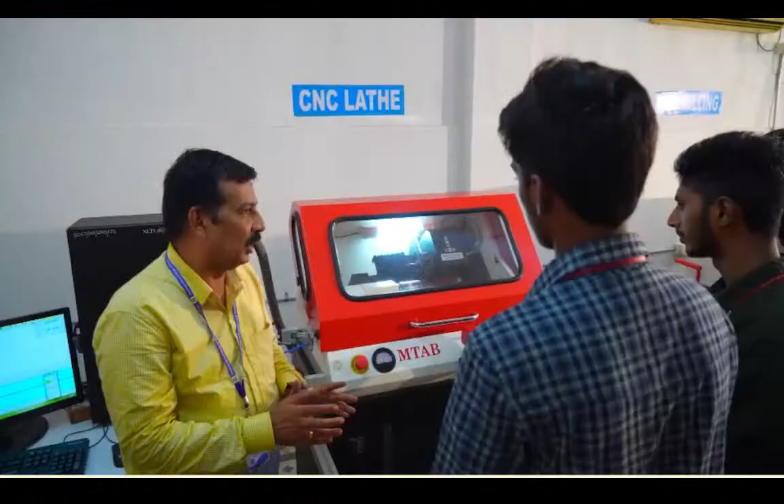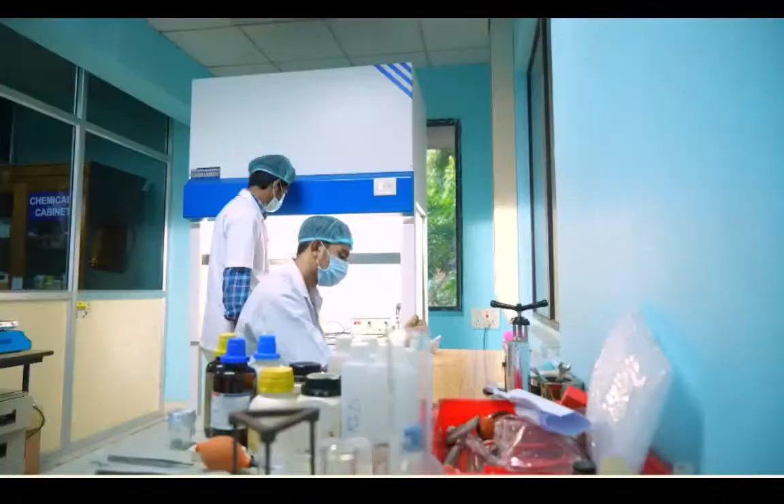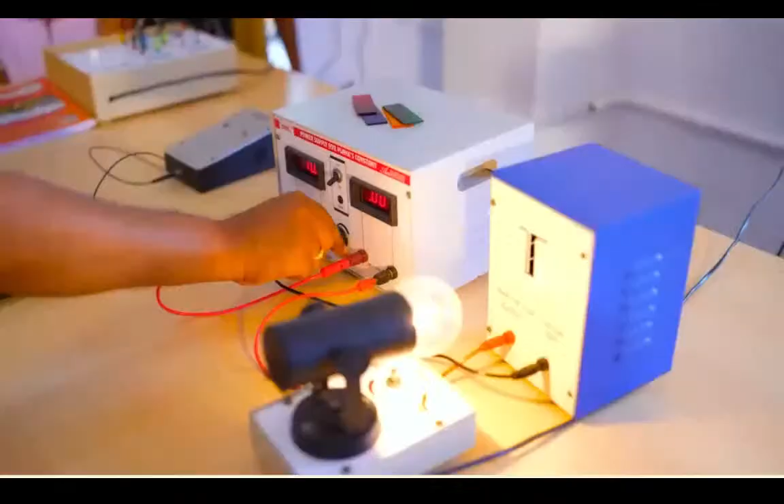Workshops of all branches, namely mechanical, electronics, computer science, robotics, artificial intelligence, nanotechnology, are equipped with the latest machinery and tools that help the students hone their practical skills.

Swarnandhra constantly motivates its students towards a fulfilling learning experience. There are 5 separate hostels available in the campus of Swarnandhra College of Engineering and Technology.

Hygienic mess and food courts. Round-the-clock security. CCTV surveillance in the campus. Departmental stores and ATM center serve the needs of students here.

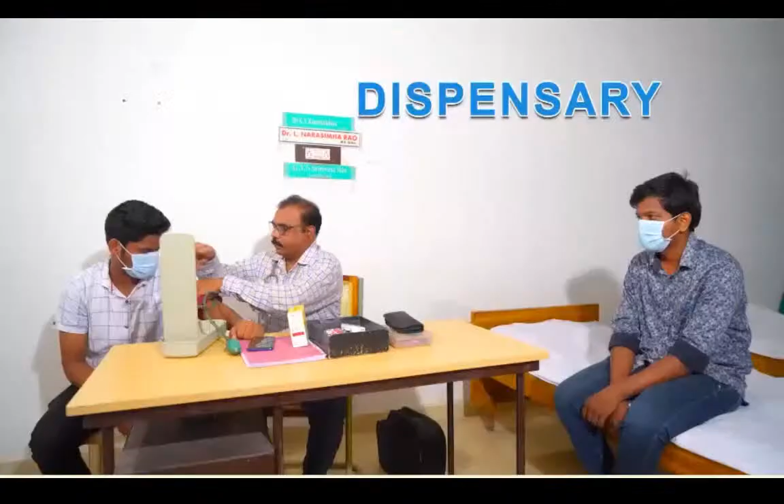We are adapting the latest technologies in the syllabus and curriculum periodically with the support of industry professionals. Your admission into Swarnandhra College of Engineering and Technology makes you transform your tomorrow with the skills you learn today, because stepping into their engineering program molds your creative absorption into technological passion.

The UG courses in BTech range from Civil, Mechanical, Electrical and Electronics and Communication, Computer Science, Information Technology, Artificial Intelligence and Machine Learning, CSE Data Science, CSE Cybersecurity, CSE and Business Systems, Artificial Intelligence and Data Science, Robotics. PG courses such as MBA, MCA, MTech, Structural Engineering, Power Electronics, CAD/CAM, VLSI Systems Design, Computer Science and Engineering, Thermal Engineering, Communication Systems. Diploma courses like Electrical and Electronics, Mechanical, Electronics and Communication, Computer Science and Engineering, Artificial Intelligence are all dealt with equal and efficient range of commitment and euphoria.

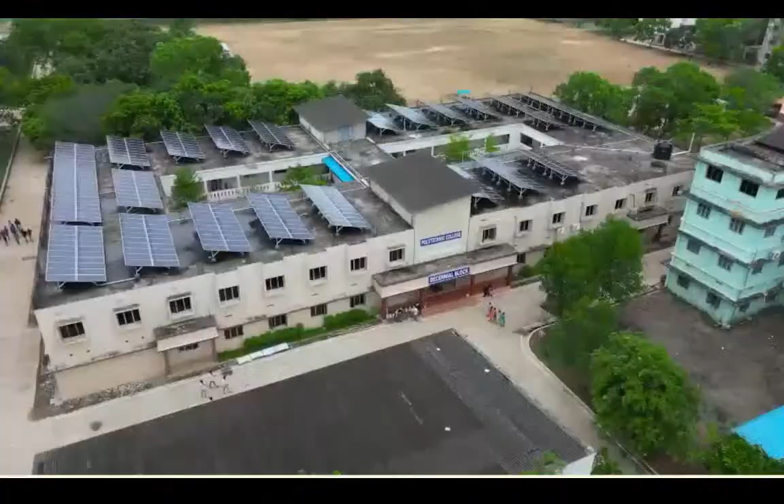Swarnandhra College of Engineering and Technology not only offers all these branches and courses, but also encourages its students to work on live projects and collaborate with their peers, giving them a taste of real-world scenarios. Another college feature is an outcome-based education, choice-based credit system, and open electives for academic enhancement.

We have well qualified and experienced faculties involved in quality education and R&D activities. The faculty members of Swarnandhra College of Engineering and Technology are not only knowledgeable but also passionate about teaching. They ensure that the students are equipped with the latest technical knowledge and are prepared to face the challenges of the industry.

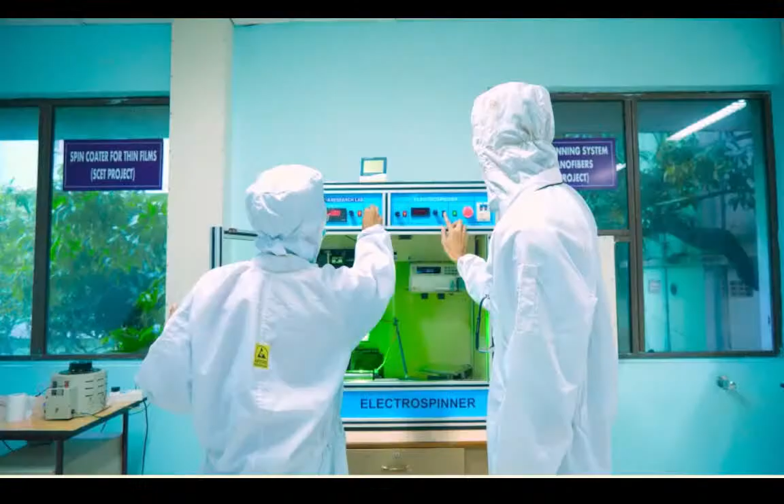Swarnandhra College of Engineering and Technology paves the path to discover the power to innovate with its centers of excellence: the CM's Skill Excellence Center, IBM's Center of Excellence, Indo-German Collaboration Arc Laboratory, Intel's Center of Excellence, VMware Center of Excellence Laboratory, Dassault Systems Lab, Cisco Networking AWS Lab, Nanotechnology Research Laboratory, and IoT Incubation Center.

Swarnandhra College of Engineering and Technology believes in the holistic development of its students, wherein a wide range of extracurricular activities help students develop their leadership skills, communication skills, and teamwork abilities.

A fabulous auditorium hosts various events and guest lectures throughout the year, and sports facilities such as cricket, volleyball, and basketball courts are top-notch, providing opportunity for students to participate in a variety of sports and fitness activities.

IEEE, ISTE, CSI student branch chapters are formed among students and function quite effectively at Swarnandhra College of Engineering and Technology. The college has permanent affiliation to JNTU Kakinada, is approved by AICTE, has acquired autonomous status from UGC, and is also accredited with grade A by NAAC.

Students are equipped with the most sought-after employability skills to make them industry-ready. Many trained students are placed in reputed MNCs like Cisco, TCS, Wipro, and CTS, etc.

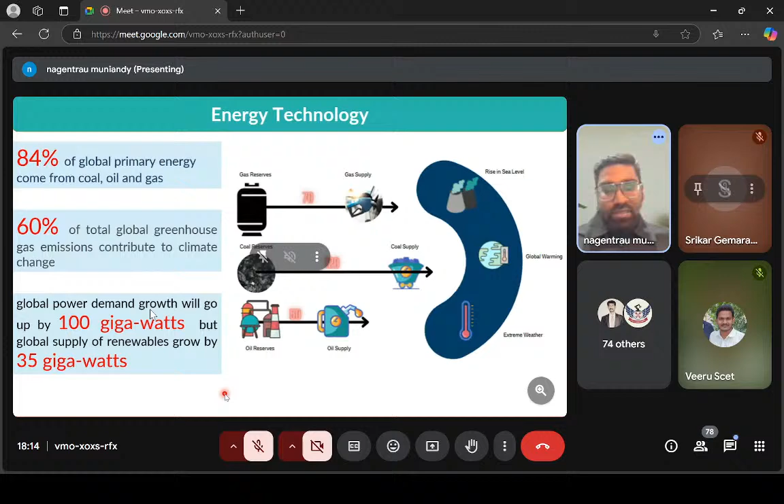Now, sustainable development goals. I think most of us are already familiar with this. There are 17 sets of goals introduced under the sustainable development goals. Previously we knew this as the millennium development goals, introduced from year 2000 up until year 2015, with 8 goals. After that, United Nations introduced 17 sustainable development goals. The main agenda of the sustainable development goals is to reduce the gap between first world countries and third world countries.

This sustainable development goals basically covers the economy point of view, environment, and social community. So we are covering humans, people, environment, and also the economy of a nation. The sustainable development goals officially started January 1st, 2016 with 169 targets. So now we have 17 goals, and from these 17 goals, each will have its sub-goals. For example, under goal number 1, there might be 4 or 5 sub-goals. Altogether under these 17 SDG goals, we have 169 targets. What's so special about this is we cannot achieve one goal alone. All these sustainable development goals should be achieved holistically, because each goal is connected and interdependent.

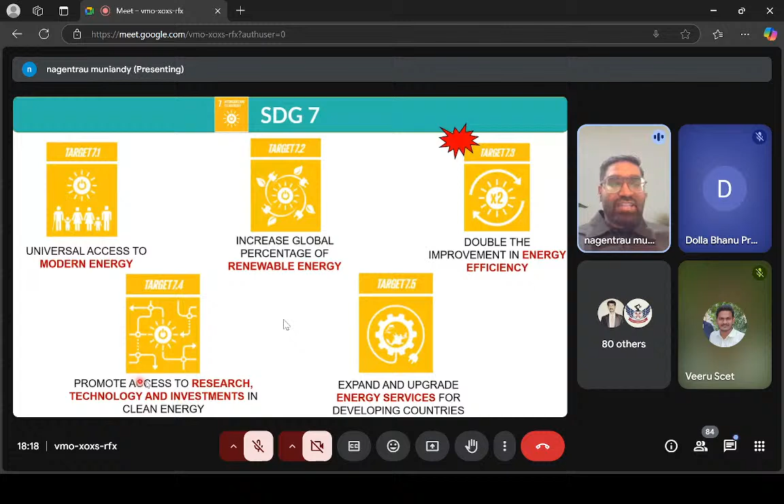And then target 7.4, promote access to research, technology, and investment in clean energy, where research centers and universities can play a crucial role under this target. And finally, target 7.5, expand and upgrade energy services for developing countries.

So that means in some developing countries, if you notice, their access to energy services like renewable energy and energy efficiency is actually accelerating. And if you notice, among these five goals, I have highlighted target 7.3, because this will be our area of interest for today.

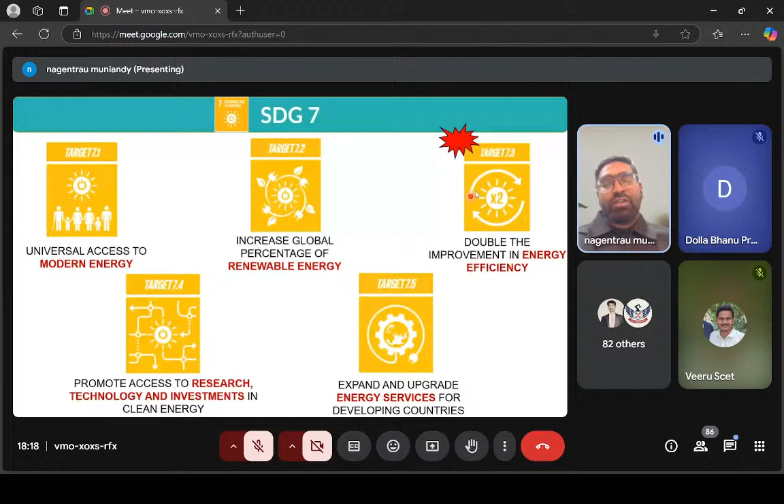All right, so before I proceed, let's discuss low carbon building. So when we talk about low carbon building, or sometimes we know this as a green building, it's not alone energy. Other than energy, we also need to consider the water consumption, how much waste we produce in the building, the mobility and transportation in the building, and greener spaces and water bodies around the building. Because all these elements that I have put here can produce carbon emission, which leads to climate change as well.

So now, by optimizing energy, water, waste, mobility, and green and water bodies, we can move towards a low carbon building. But today I'm going to cover energy only. Why only energy? Because energy is the major contributor towards carbon emission.

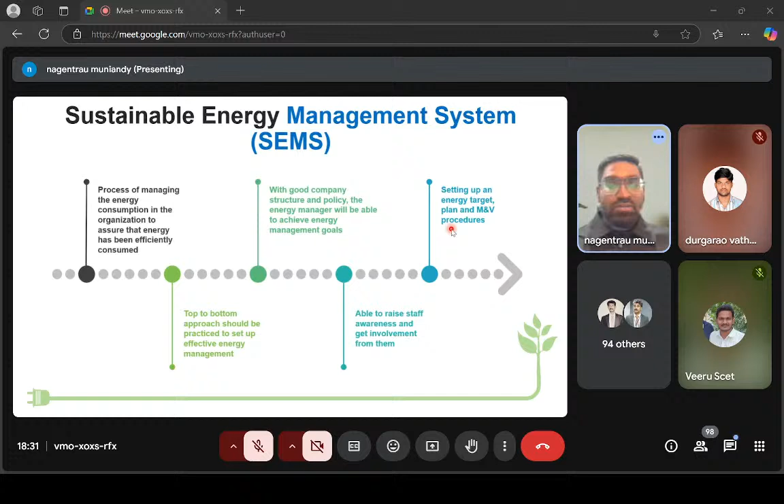So once they take the proper action plan to reduce the energy cost, what happens next is they might change their focus into other things - for example, in a campus, maybe they focus on student issues, or staff related issues. Then the focus on energy management is neglected, and the cost of energy rises again, and we repeat this step.

But when we talk about sustainable energy management system, it's all about continuous monitoring, continuous effort, continuous implementation of energy efficiency. So this is what we call a sustainable energy management system - once I have achieved cost reduction, I monitor and report that so I can realize further saving.

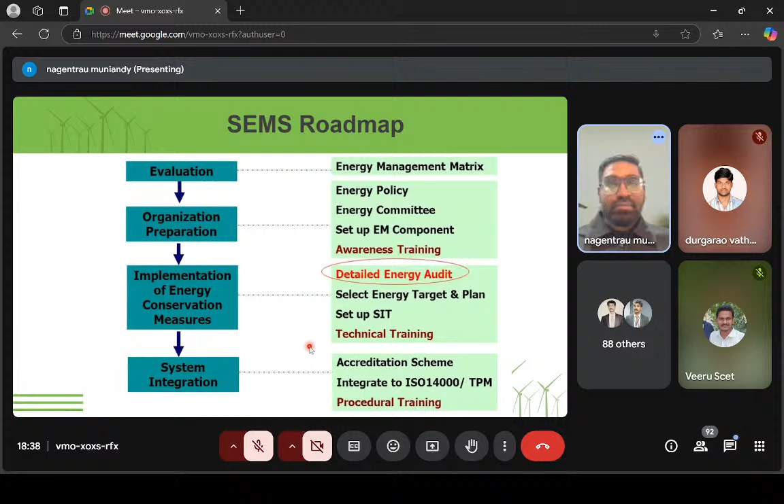So this is the typical energy management matrix tool. As I mentioned, it's more like a rubric - as an academician, I believe you guys are very familiar with rubrics. Under this energy management matrix, there are 6 pillars: energy policy, organization, motivation, information systems, marketing, and investment.

So under energy policy, let's say for example I wanted to know about your campus building's energy management - I will use these rubrics. First, I will check whether there is an energy policy or not. If there's no policy, I will tick here, 0. Or sometimes most buildings have an unwritten set of guidelines, I'll tick here. And then organization.

So organization - is it a dedicated team to manage energy, or is energy management just part of the building operations or not? I think that's accordingly scored. Then the motivation - this is more about the contact between the building community and the energy committee.

Is it just informal communication from facility management to the building community, or is there a dedicated channel? Then the information system - this is more about, for example, if you go to some buildings, they display today's consumption versus yesterday's consumption and so on.

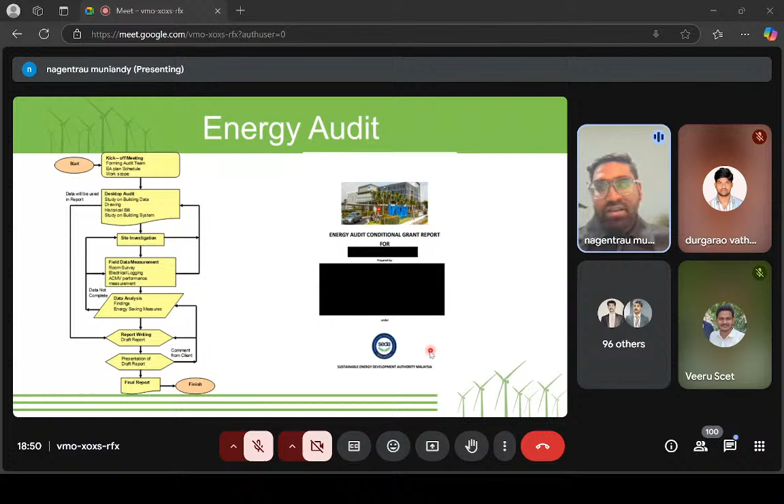Then we have done the energy bill analysis. For year 1, which we consider as the baseline, we have done energy bill analysis. And normally in Malaysia, we look at the BEI, the Building Energy Index, for commercial buildings.

So how do we calculate the BEI? Annual energy consumption for that year divided by the gross floor area of that building. This is basically an indicator to show how good your building is in terms of energy efficiency. The lower the BEI, the better. So we have achieved around 153.50.

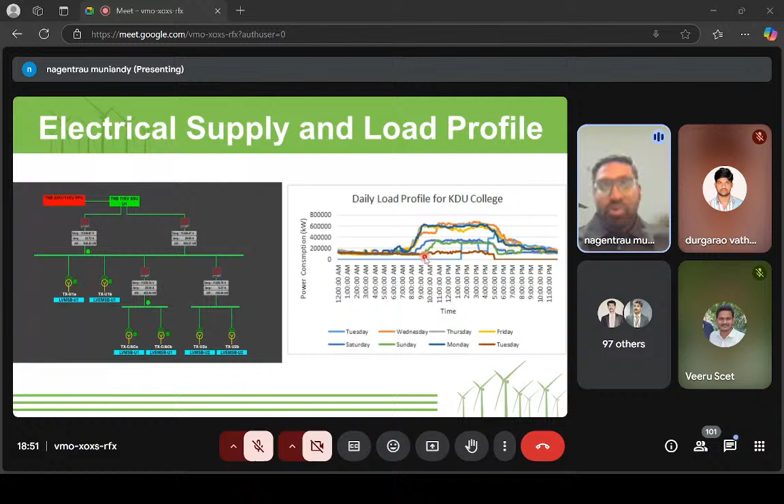Then next, we did a detailed energy audit, studying the electrical supply and load profile. I won't go into too much detail here, this is just for sharing. Then we studied load apportioning.

So which area of the building consumes more energy? For example, the main building. Then the significant energy user - which area is the significant energy user? We have noticed that the chiller is the significant energy user.

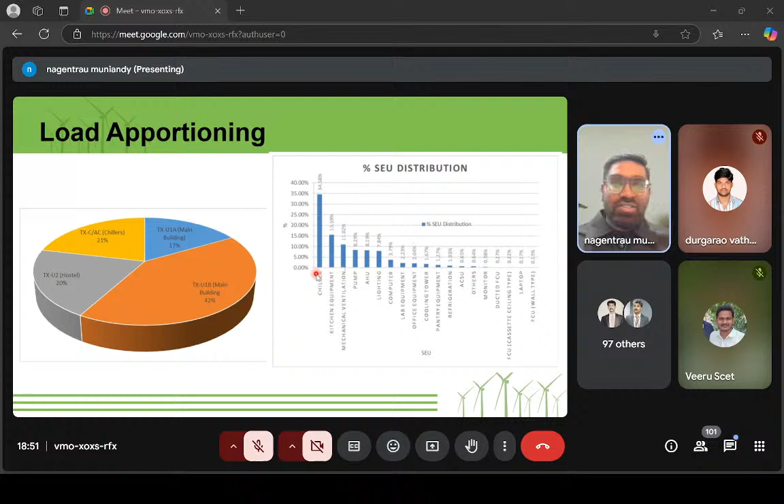Then we studied our ACMV system. We also did a room data survey. Talking about the room data survey, basically we studied 3 things: temperature, relative humidity, and CO2 emission.

We noticed that most of the space is within the range, and some spaces are very cold. So this is the space that we can target to maybe increase the temperature so that the energy consumption will be lower.

And then room illuminance - we measure the lighting level. According to international standard, is the lighting level okay, or is it overlit or underlit? We noticed that most of our space is overlit, so that means there is one more opportunity to do energy saving.

Then the CO2 level. Normally the CO2 level should be between 700 to 1000 ppm, or lesser than 700. Lesser than 1000 is still acceptable, but more than 1000 ppm is not acceptable, because if the CO2 level is more than 1000 ppm, it can cause some other issues.

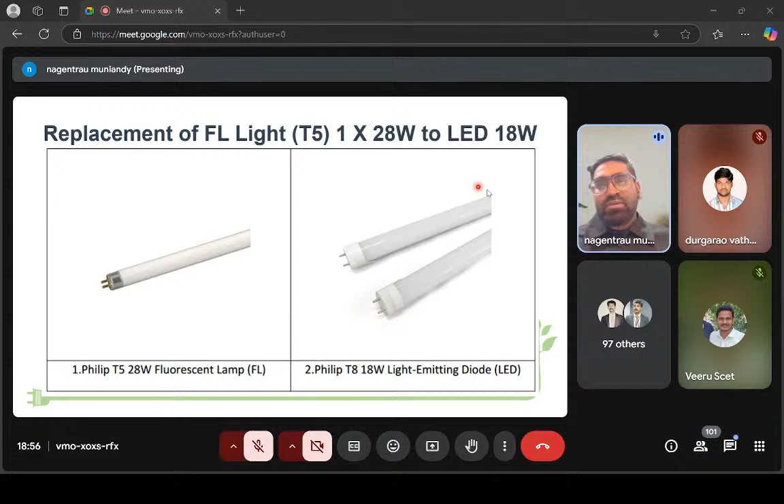And then in terms of the technical part, we have replaced, as I mentioned, most of our area is overlit, so we have replaced it with lower watt bulbs or lower watt lightings.

Are you ready to join it? Do you want to forge your own path with its top-notch engineering curriculum? Don't you want to be part of a community of innovators, creators, and problem solvers? Swarnandhra is a place where thinking out of the box is contagious, and it is also a place where ideas inspire change. Here you are welcome to the prestigious Swarnandhra College of Engineering and Technology, where excellence meets innovation.

Swarnandhra College of Engineering and Technology is a well-maintained...

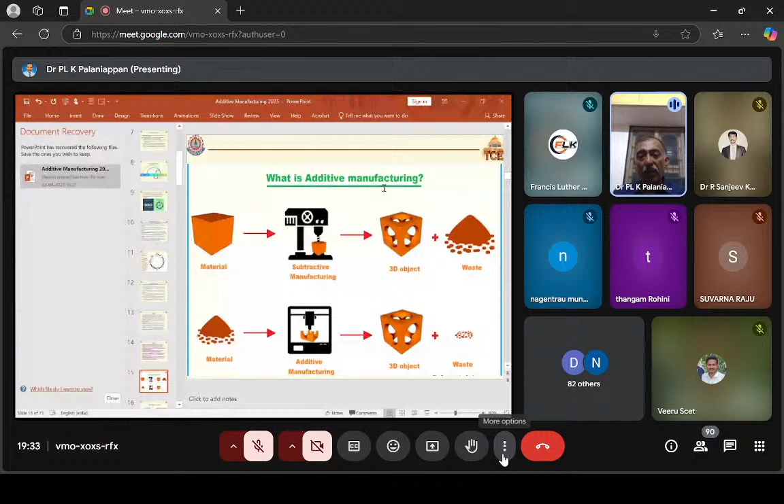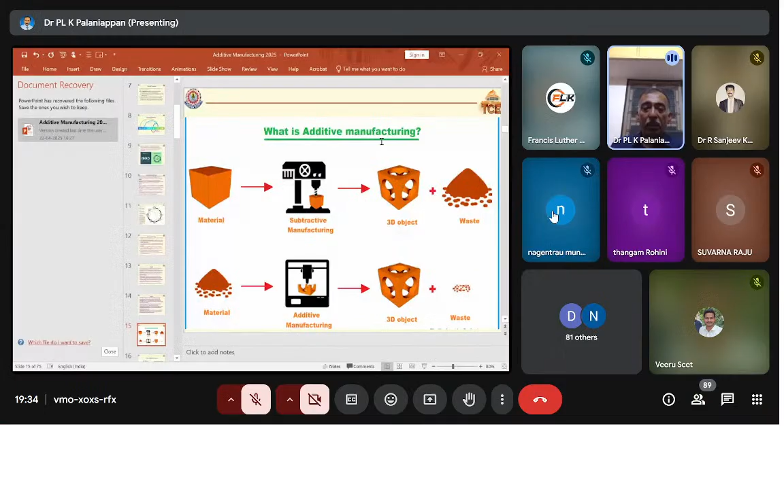So what is additive manufacturing? Some of you may have this question. Additive manufacturing is nothing but taking a material and adding it layer by layer, one above the other, starting from the bottom. The material may be in powder form or liquid form. It is deposited by a nozzle or a gun which moves along a stipulated path in the area, and finally you get the finished product.

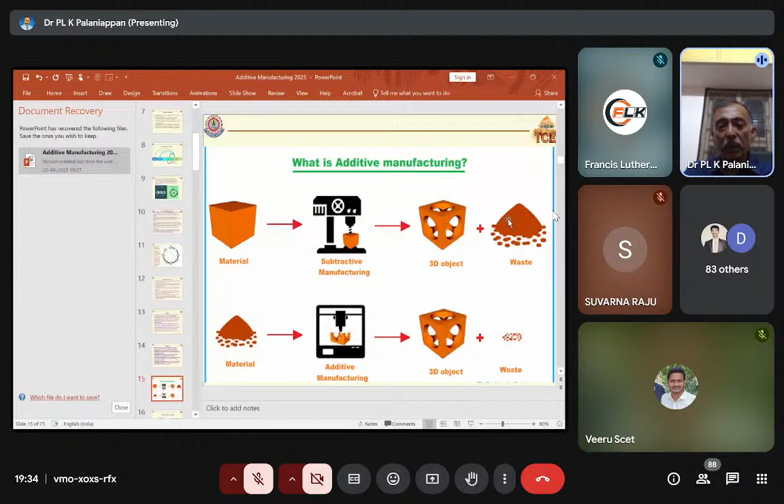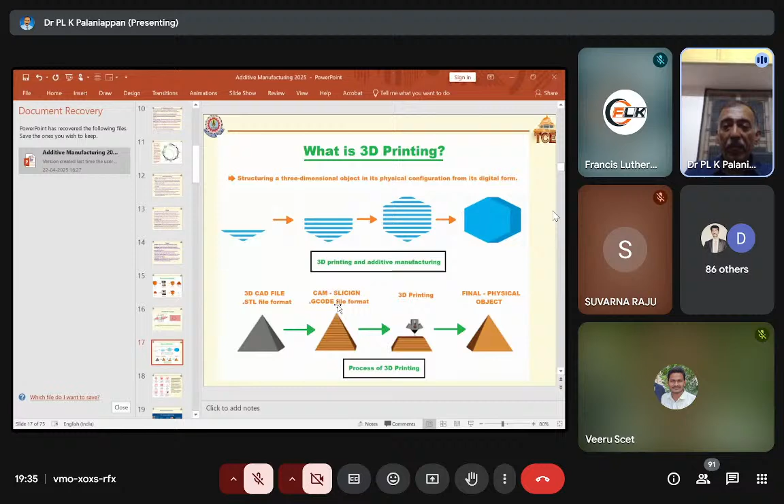On the right hand side, you can see only one layer. For this one, we are going to get the product modeled, and once the product is modeled, we are going to structure the product, that is, we are going to add layers by layer to get the final product. So here we are going to have a CAD file in STL format, and that CAD file can be imported to a CAM machine, where it is going to do the slicing, and finally the sliced files are transferred to the 3D printing machine, where you are going to build the product and get the final product like this.

So again, this is how an idea is converted into a product. You have an idea, once you get the idea, you are going to get a 3D model, and the 3D model is going to be sliced because we want to have a number of layers. So suppose if you want your product to be very fine and precise, then you have to have slicing with very thin slices. That ensures your product is going to have a very good surface finish.

Once the slicing is over, then all these sliced files are going to be uploaded into the 3D printer machine. On the other side, the 3D printer machine has got a material, that is a filament. Mostly this follows fused deposition modeling, where we are using the raw material in the form of filament. That filament is available in the form of coils, and the material is being supplied from the coil to the nozzle. You can see here the nozzle, and this nozzle is going to move, and as it moves, it is going to do the printing job.

Once the printing is over, the product is removed, and in the post processing, whatever supportive material is used, suppose you want to have a hole in a particular place, that place is occupied by a supportive material, not the build material. We have two materials: one is the build material, the other one is the supportive material. We will see that one in the later slides.

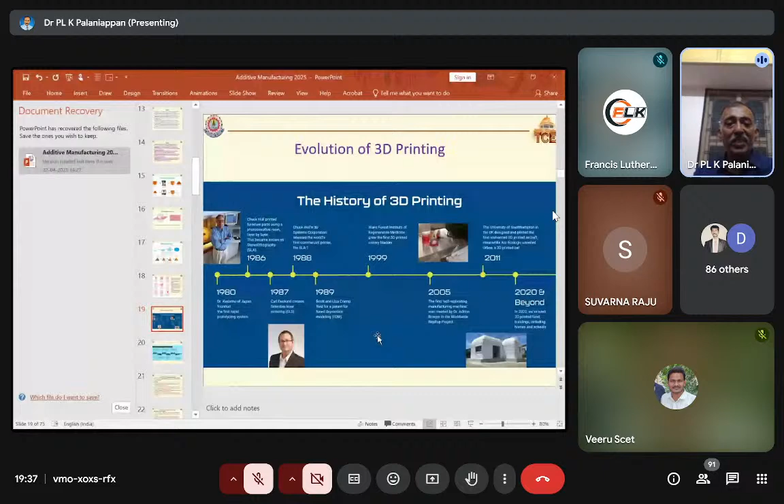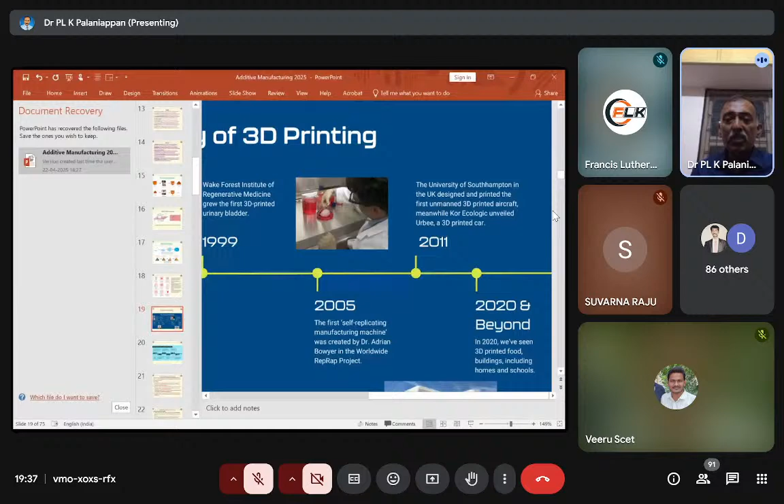So this is the evolution of 3D printing, how 3D printing evolved. Actually, the first 3D printing concept was introduced in 1980, and nowadays in 2020, we are able to see it being used in food, buildings, homes, schools, and any places - that is today's role of 3D printing. And the 3D printing moments.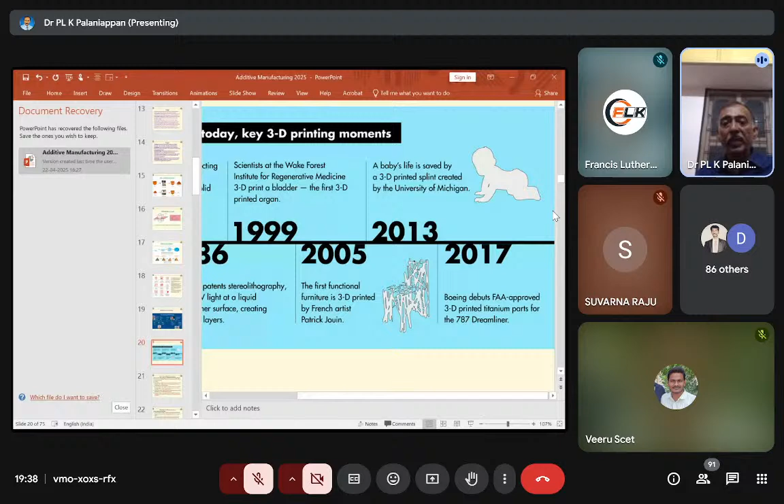So nowadays you can see the latest innovation here is 3D printing of titanium parts for the Dreamliner 787 Boeing aircraft. So in the Boeing aircraft, even these 3D printed metal parts are used as a part itself. And if you look some years back, 10 years back, a baby's life was saved by a 3D printed splint by the University of Michigan. So we have very many moments in 3D printing revolutionary technology.

We have two words, 3D printing and additive manufacturing, which are being used interchangeably. The difference between them is very subtle, not much difference. 3D printing is generally a consumer grade printer, like our printer at home - it's like a printer, very small equipment. You can do small product printing. It's a consumer grade printer for small scale production.

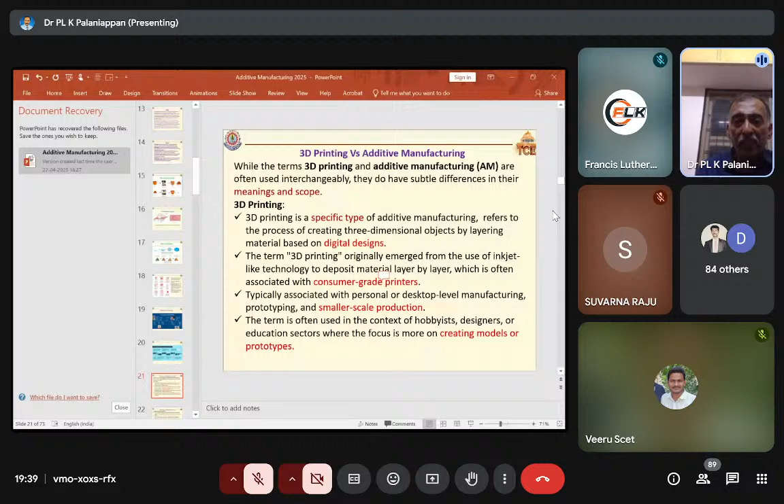You are able to make our creative ideas into models and prototypes. For this, we have been using 3D printing technology, and if you want to use it in a big way, in an industrialized way, then that is called additive manufacturing. Additive manufacturing is a broader term. It includes a wide range of technologies and materials, and is being used in almost all industries, right from aerospace, automotive, healthcare, construction, medical, and all fields.

So it involves advanced technologies and professional grade equipment. Here our equipment is going to deliver a real-time, functional product. It can produce very complex parts, you can scale up your production for large scale production, and the manufactured part can be straight away used in real world applications. Unlike 3D printing, which is mostly used for proof of concept.

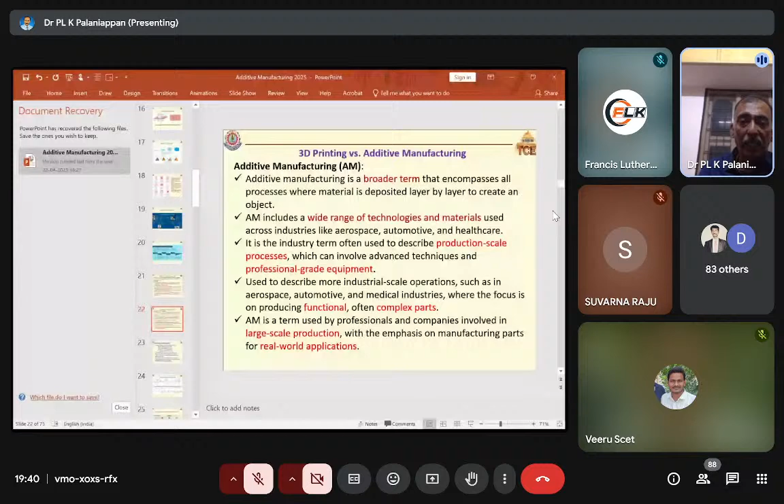Suppose you are coming out with an idea, and you want to know whether that idea can be implemented, you want to have a proof of your concept. For that we have been using 3D printing, which is consumer grade. Whereas additive manufacturing is a real-time product you can make.

There are many wider techniques used in additive manufacturing: electron beam melting, direct energy deposition, selective laser melting, and laser metal deposition. These are very new techniques being added here. By using these techniques, we are able to get industrial grade products, and you are able to get load bearing parts that can be straight away used in real time environments.

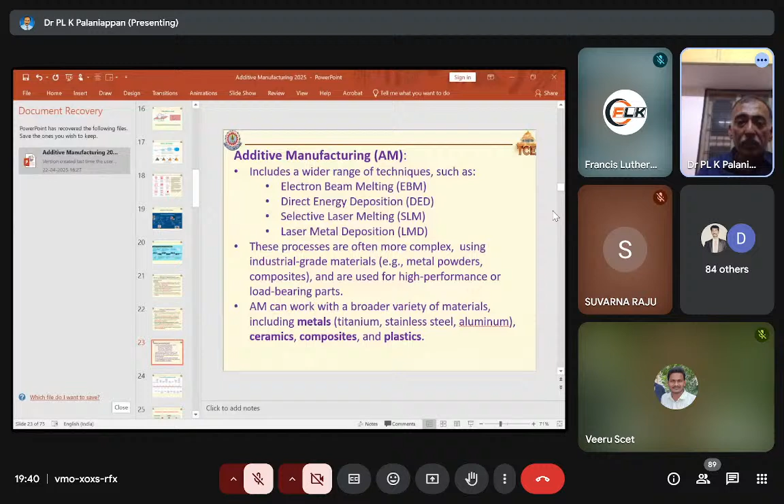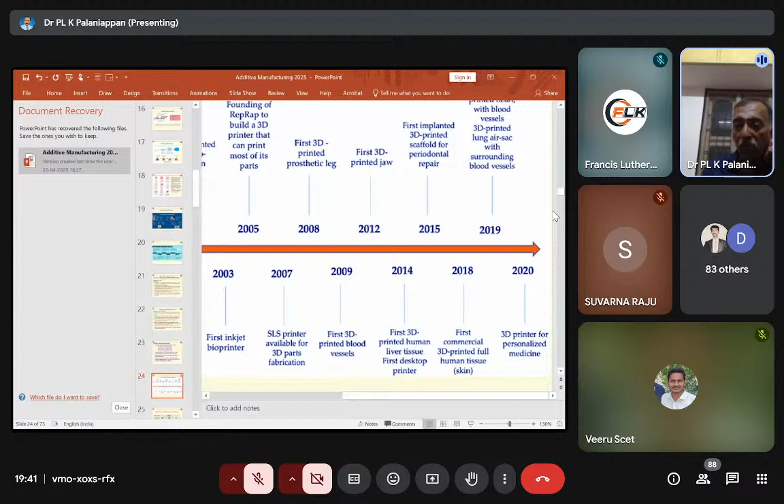This is a timeline of 3D printing in the medical field. This 3D printing is very widely used in the healthcare sector also, that is, in medical printing. Many bio parts are being printed, and nowadays the era is personalized medicine. People are going for personalized medicine and personalized medical care, so for that they are going for this 3D printing. The first commercial 3D printing for full human tissue was achieved in the year 2018 itself.

If we take point by point, that is the point dimensional order, the process is like an inkjet printer, our traditional inkjet printer, where it deposits the material as a point, building the material point by point. It is a very slow process and not much in use, but it is very cheap. It is mainly used to have a proof of concept, if you want to check your concept.

Another one is the line. Here the material is deposited as a line, one layer over the other. In this technology we have selective laser sintering and extrusion free forming. Selective laser sintering uses powder based material, and extrusion free forming uses paste and wire as starting materials.

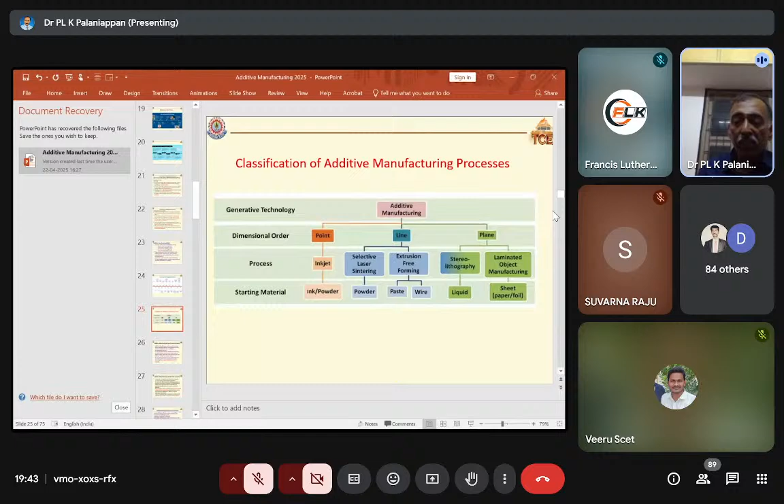Another one is the plane, where you have one plane over the other. This is a very fast process, where the build speed is very high. Here we have stereolithography, where liquid polymers and epoxy polymers are used, and laminated object manufacturing, where a sheet, which may be paper or nowadays even metal foil sheets, is used. You can build parts in a very short span of time.

Now we are going to see how additive manufacturing is associated with circular economy. These are two concepts: now you are aware of additive manufacturing, and earlier you have seen what circular economy is, which is nothing but wanting to reuse or recycle our used parts, or use our parts to the maximum extent possible. Additive manufacturing is a technology where you build the parts layer by layer, so the waste is minimized. This is one aspect where these two principles come together.

People often use the words 3D printing and additive manufacturing as synonyms, because the principle is the same, only the scaling, speed, and technology are a little updated in additive manufacturing. It involves creating objects layer by layer. As we build the object layer by layer, the wastage is minimized, and as the wastage is minimized, we are reducing the use of material. That is also one of the very principles of circular economy: reduce, reuse, recycle. That is the main principle of circular economy.

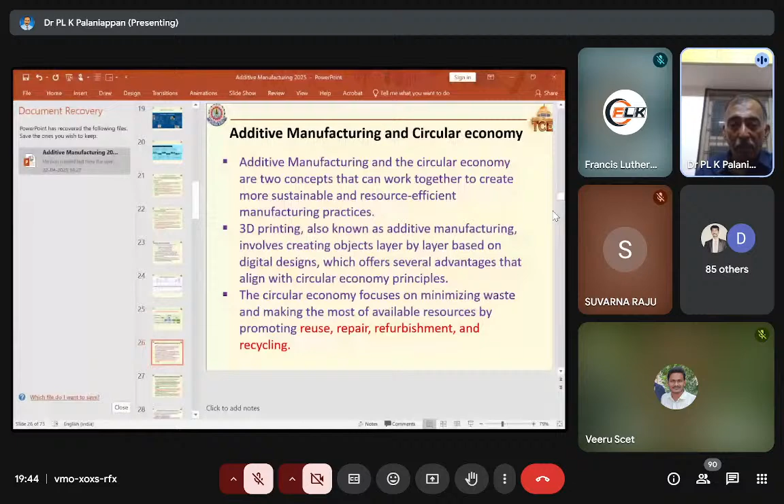3D printing is being used in automobile industries. In the automobile industries, plastic recycling and 3D printing purposes are very widely used and have taken a very big lead, because it uses very less material wastage. It ends up with very less material wastage, and you are able to get the near net shape, which means post processing is very minimum. As post processing is very minimum, secondary operations are very less, and the energy spent for secondary operations is very less. That also adds value to the economy, as you are not spending energy and money on secondary operations. The other sustainable benefit is that it also reduces emissions, which is also a very big thing, since when the number of operations are reduced, the emissions are also reduced.

3D printing plays a significant role in following aspects. There are about 9 aspects, and we are going to discuss them one by one.

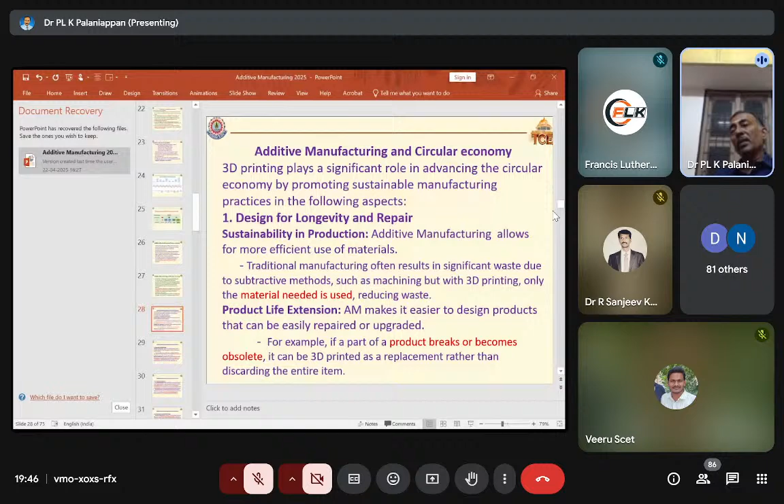One is design for longevity and repair. Additive manufacturing has sustainability in production due to its longevity. Whatever material is needed is used, so scrap is very less. It also makes it easier to design products that can be easily rebuilt. When a part breaks or wears out, that particular portion alone can be rebuilt, which is another beauty of 3D printing. Replacement and rebuilding is very easy, so you need not discard the entire product, only the worn out part.

Another aspect is use of recycled materials. Many materials are being recycled through closed loop systems, as we've seen with IKEA's closed loop cycle, where the furniture manufacturer uses old furniture to reduce waste. Some companies have also started using waste from landfills to reduce virgin resources.

Another aspect is material innovation in 3D printing. Nowadays many materials are being tested, and real-time materials can be used to build parts, which is why parts are ready for real-time applications.

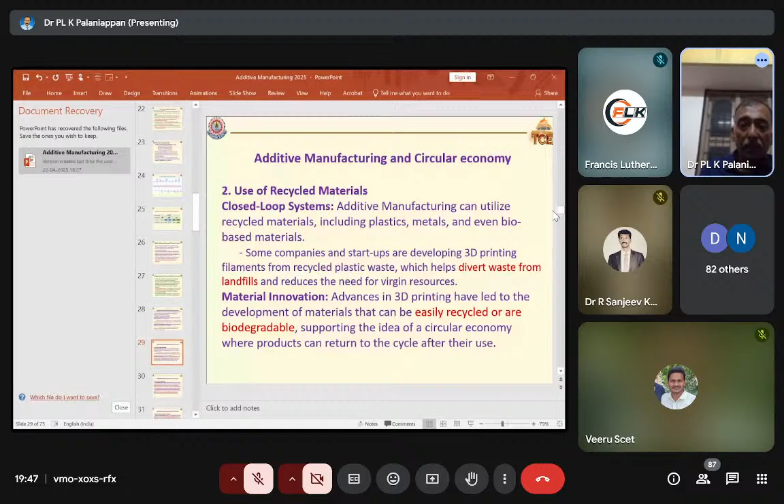Another beauty is on-demand production. This concept is associated with the economy, GDP and GNP, because it promotes localized manufacturing - wherever you want the product, you can make it in that place using additive technology. This decreases the carbon footprint, reducing fuel spent on transportation and the inventory needed in the supply chain, including finished goods inventory, which always carries a threat of obsolescence since technology changes so fast.

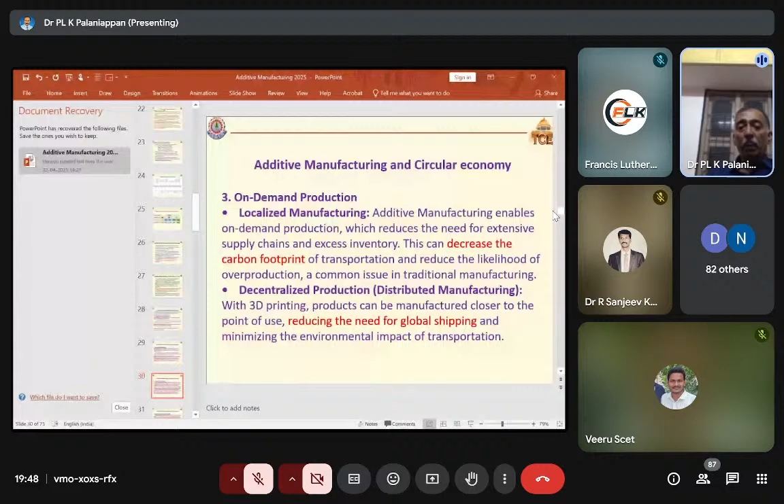Your product can become obsolete at any time, so here, whenever it is demanded, you produce it - this is called on-demand production at the place where it's demanded. This is decentralized, distributed manufacturing, minimizing shipping since it's manufactured at the place where it will be consumed through additive manufacturing technology.

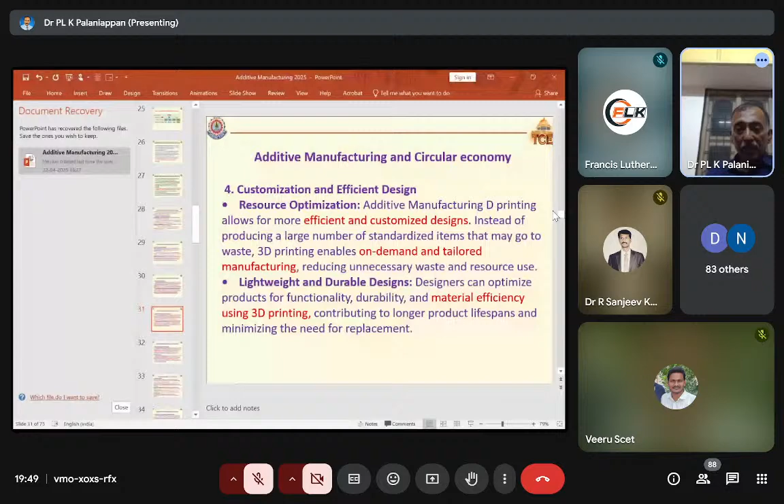Another aspect is customization and efficient design. With additive manufacturing, you're able to do efficient customized designs. Going for on-demand and tailored manufacturing avoids unnecessary resource and material waste, and helps get products at a lighter weight. In 3D printing, you can use analysis and simulation packages like ANSYS, and the output can be directly given to the 3D printing machine to build the material wherever you want. With less strength needed, you can go for alternative materials to reduce weight - another advantage of additive manufacturing.

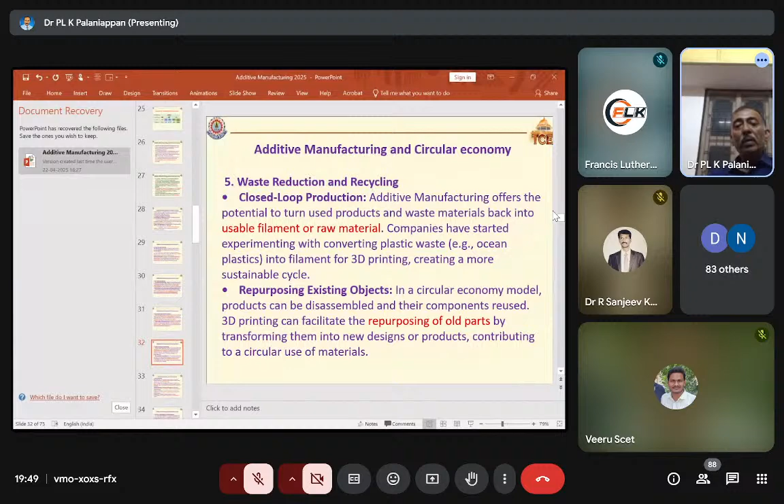Another aspect is waste reduction and recycling - repurposing existing products. As discussed earlier, the refurbished market is a very big thing nowadays.

Another aspect is rapid prototyping, which is the order of the day. Nowadays people go for rapid prototyping to get new products very quickly. Gone are the days - some 30 years back on Indian roads we could see only 3 or 4 types of cars: Ambassador, Premier Padmini, Plymouth, etc. Nowadays every 6 months or even every 3 months, automobile companies release a new version or model. This is possible because of rapid prototyping technology.

Rapid prototyping gives you iterative designs in a very short period - it's able to do iteration quickly, meaning in a few hours you can make a prototype. Earlier, the average time spent by the automobile industry for making a prototype was about 2 to 3 years. Now that period has been reduced to just a few hours.

There's a case study done at our place in Madurai, where Sundaram Fasteners, manufacturers of fasteners for the automobile industry, reported that a fastener which took 6 to 8 months to develop 20 years back can now be done within 12 hours because of rapid prototyping technology. That is the innovation speed and flexibility that 3D printing provides.

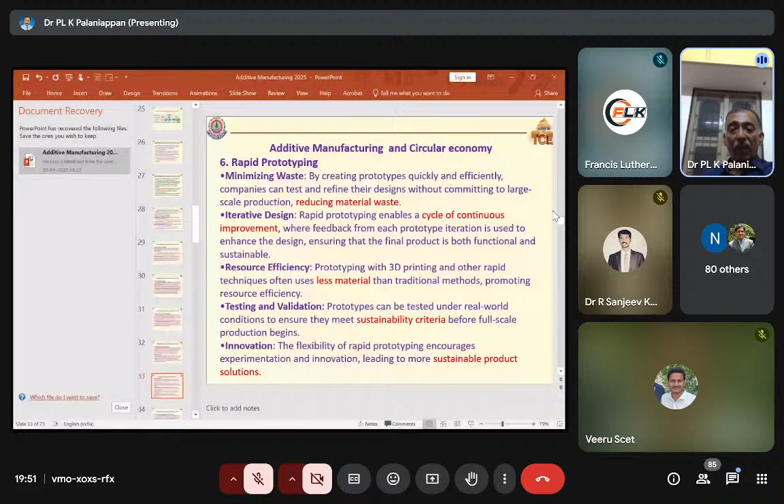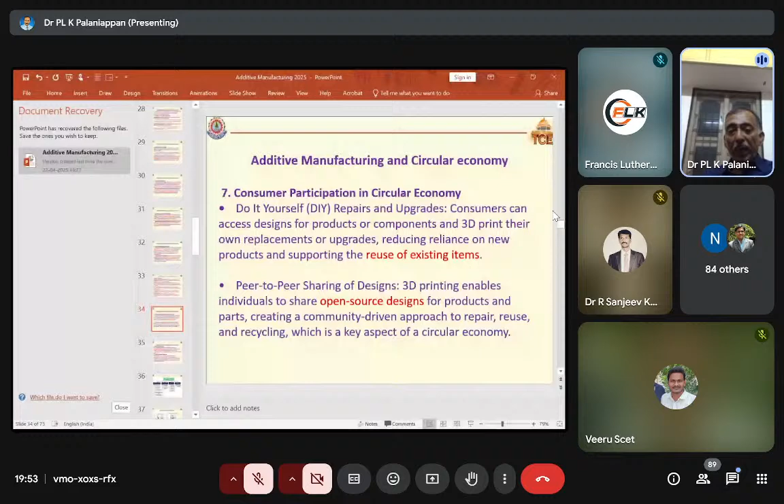DIY is a very big concept in Western countries, where getting a technician for installation or small household repair is a very costly affair. So with components or products designed with 3D printing, they have supporting documents for reuse of existing items, and peer-to-peer sharing of designs is also very much there, because many 3D users use open source designs so you can learn how to repair it, reuse it, or troubleshoot it. That also aids the circular economy.

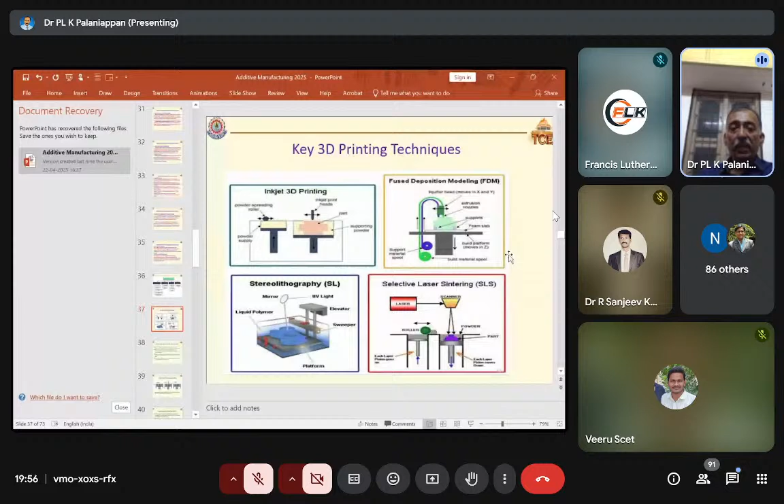This particular slide shows four main models, four main technologies which are used nowadays and have wide presence in the market. First is inkjet printing, next is fused deposition modeling, next is stereolithography, and selective laser sintering. These are the four methods which have very great market share in additive manufacturing.

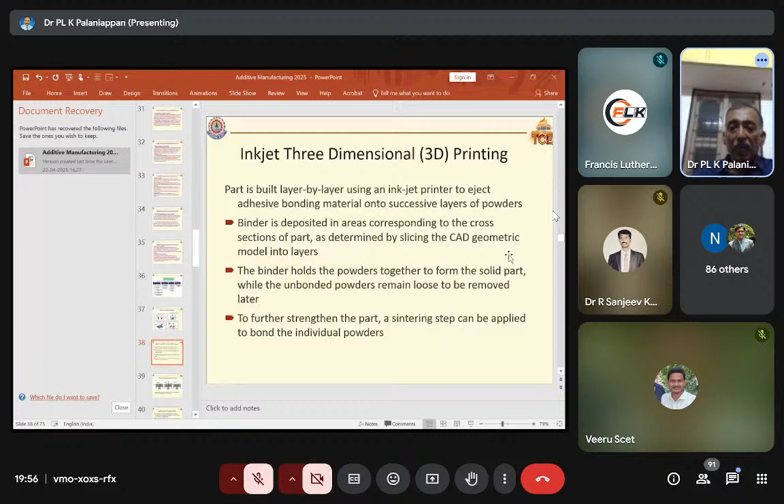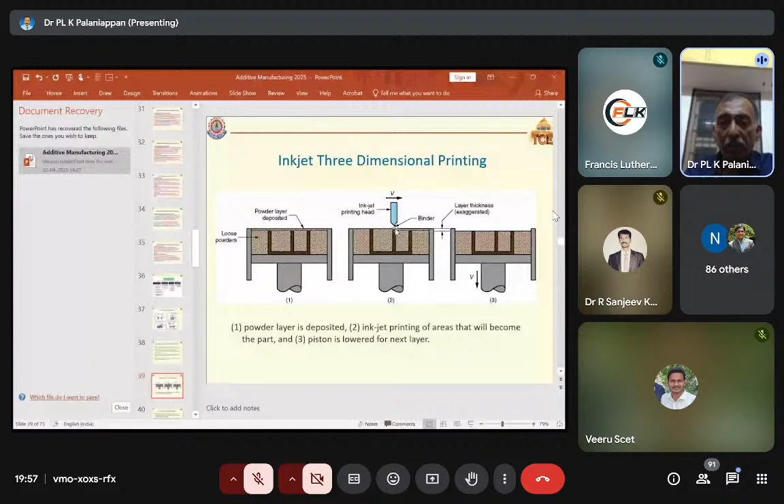Next one is fused deposition modeling. It is, as I told you, very popular and widely used. Here you are having an extruder.

The extruder can move in the XY plane, and your nozzle can move up and down in the Z direction. So by the way, you are able to produce a 3D product.

So this is the schematic diagram of your machine. You have a computer connected to the machine. This diagram also shows the status of the machine. We have a similar type of machine in our college.

Here you are having a filament supply that is done through a filament cartridge tank. From there the filament is supplied, and this is a nozzle. In this nozzle you have heaters, so it is going to melt the filament, and the filament is deposited in the place where we want it.

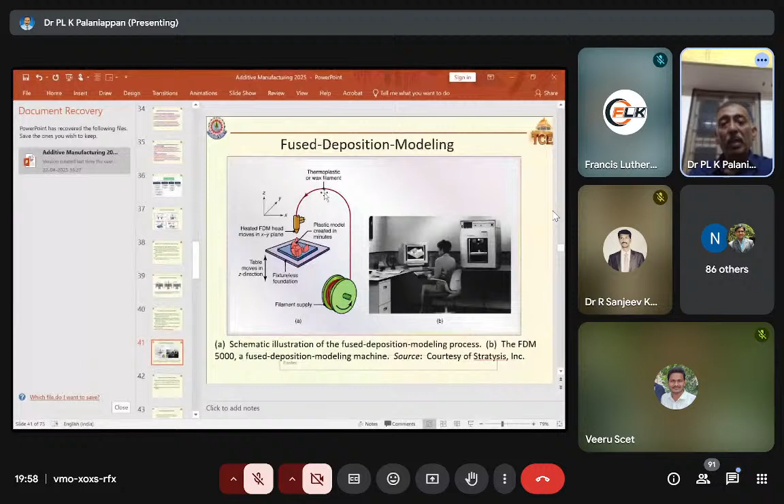This nozzle can move in X and Y directions, and this table can move in the Z direction. By moving the table and the nozzle, layer thickness is achieved, and this table moves to have a product configuration. Wherever you want support material, it builds support material. Wherever you want real product, the nozzle supplies build material. So the nozzle can supply build material as well as support material.

The common plastics used in FDM machines are PLA, polylactic acid, ABS, acrylonitrile butadiene styrene, and PETG and nylon. So many machines are using PLA and ABS nowadays.

Next one is stereolithography. It is popularly called SL or SLA. This is an RP process, mainly used for rapid prototyping, because this technology is used in many industries just to make and test their prototype, in a small time frame. The first commercial printer became available in 1988 by Charles Hull, the first commercialized 3D printing machine based on stereolithography.

In stereolithography, it builds the product layer by layer. Here you have a liquid polymer in a tank, and here you have a laser which does photo curing. So the layer is exposed to curing, and wherever it is exposed, that part gets cured. Once it is cured, it moves down. This movement in the Z axis, as the part builds, moves down and down, so when it reaches the bottom, your entire product has been built.

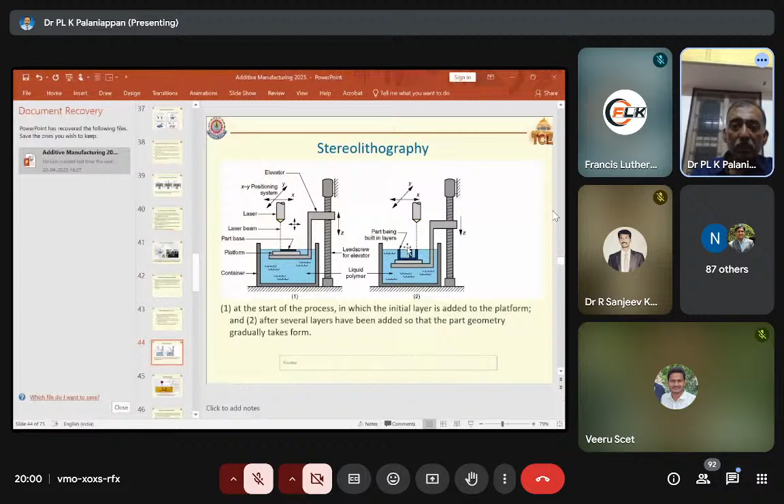So this is the technology used in stereolithography. Again, in stereolithography, the curing can be done by many sources like UV light or laser, depending upon your material.

Next one is selective laser sintering. Next to stereolithography, we have selective laser sintering, where powders, either metal powders—nowadays direct metal laser sintering is also available, but those machines are very costly and used in industries. Selective laser sintering using polymers is used in research institutions and educational institutions, again as equipment for making prototypes.

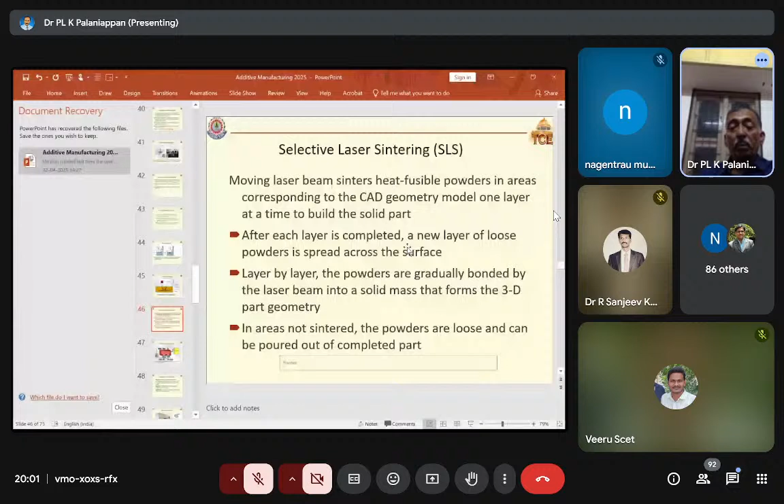Here a layer is built. Once a layer is completed, the loose powders are sintered. It is like applying heat, and we sinter the powders, so the powders are solid-state welded, and you get the product. So this is selective laser sintering.

Here you have two cylinders, one is a powder feed cylinder, and another is the part build cylinder. Once the powder is fed, the roller mechanism rolls out the powder, and it comes to the build cylinder and is deposited there. By this way, the product is built layer by layer.

This process is used for metals as well as non-metals, as I told you. Polymers like nylon, metal, glass can be built using this. Even nowadays, people are building composite materials using this selective laser sintering.

They are used as functional prototypes. That is very important. Functional prototypes are very much required, because gone are the days people are satisfied with physical prototypes alone. They don't want to stop their testing or validation with just a physical prototype. They want a functional prototype to use in a real-time environment, so functional prototypes are built with selective laser sintering.

You are sometimes able to get end-use parts. If the number of parts required is very low, it is better to go for additive manufacturing, which will be more economical than conventional manufacturing methods. So when the part is required in low volume, nowadays additive manufacturing is being preferred. This is a selective laser sintering machine.

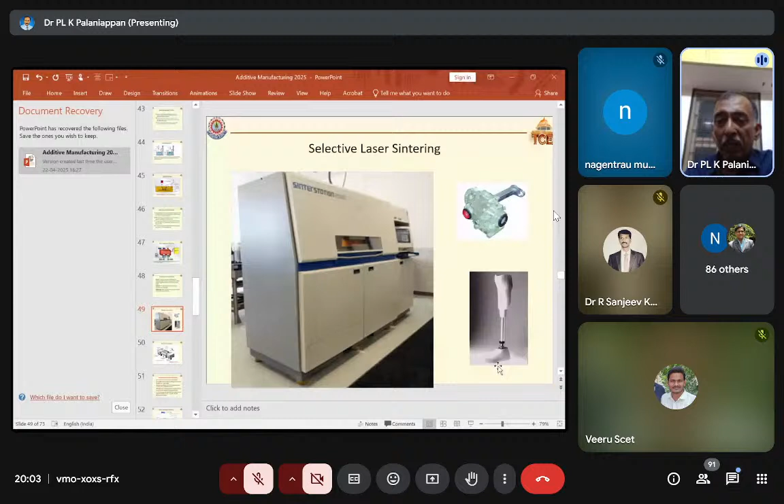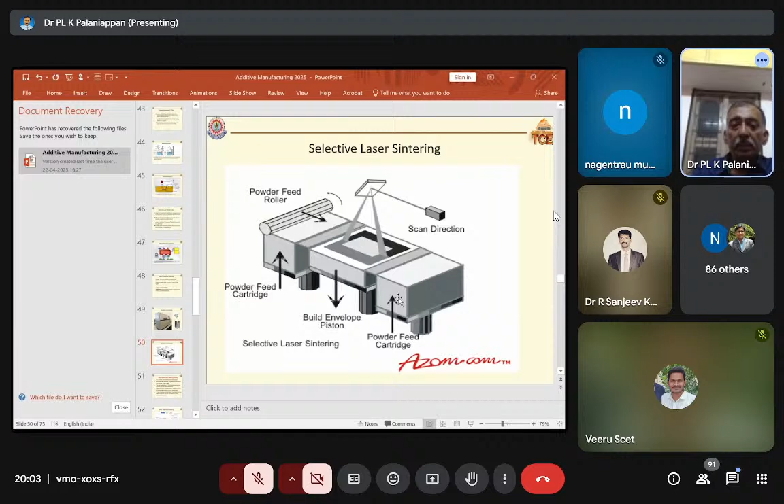Another advantage of selective laser sintering is direct metal sintering. As I told you, even metal powders can be fused, and you can get a prototype in metal itself. So you are able to get a fully functional product manufactured using this direct metal laser sintering, which is heat resistant, strong and durable, as good as your original product, because you are going to use the original material. Whatever the design material is, that material can be used for this process.

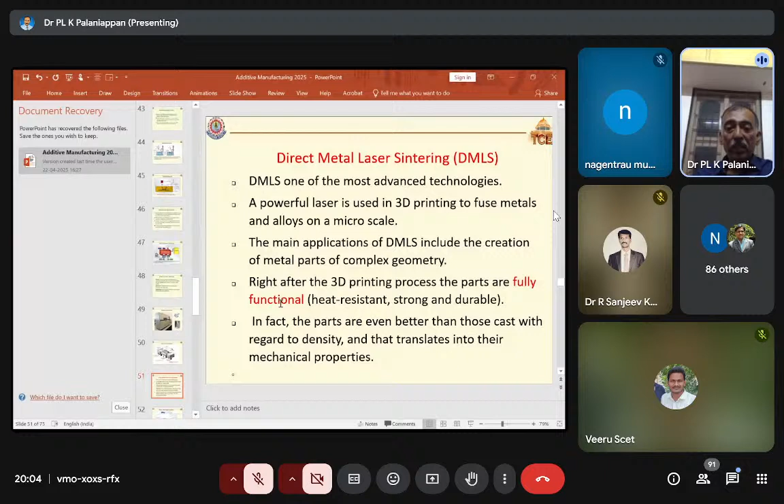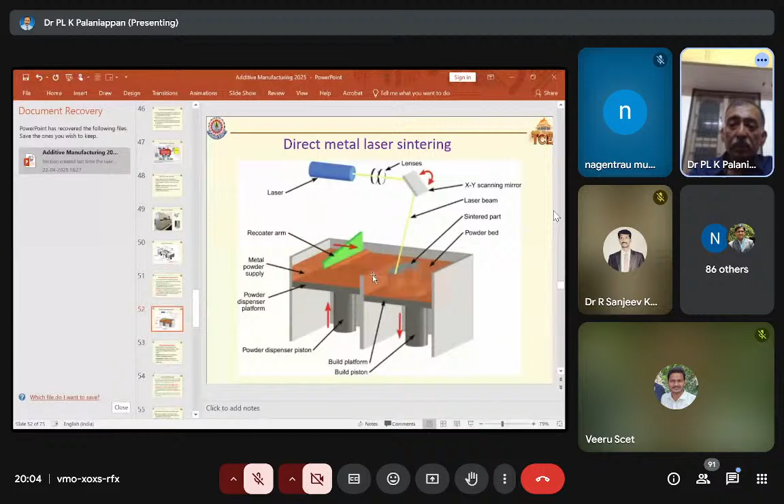Now, almost all metals and alloys can be built using this direct metal sintering. You can build steel, titanium, even high temperature metals, high corrosion resistant metals like cobalt and chromium can be built using direct metal sintering. Applications include complex metal parts used in aerospace industries for aero engine parts. Many aero engine parts need either nickel cobalt or chromium cobalt alloys that can be built using this direct metal sintering, where you require low numbers.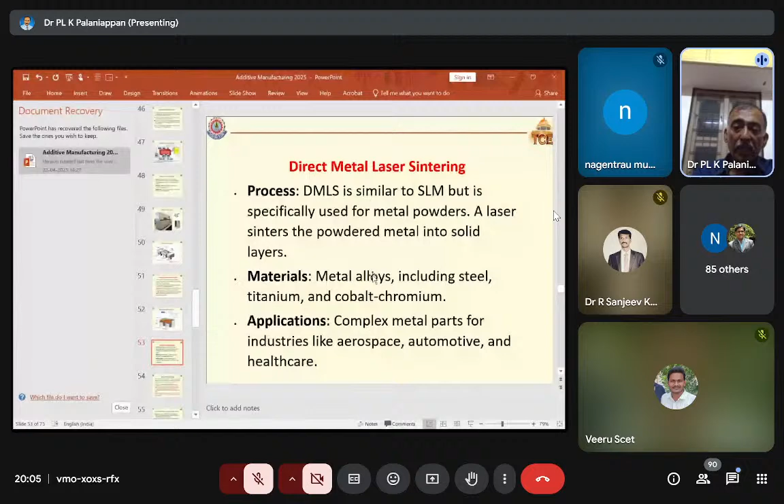Why am I taking the example of aerospace? In aerospace, we are not involved in mass production. We build very few numbers - you can count the numbers on your fingers only. Suppose we take Boeing, they may have a target of building less than 50 aircrafts in a year. It's for such low volume. If you want to build a very minimum number, low volume, direct metal sintering is taken as a competitive option.

Advantages of direct metal sintering: with this method you can manufacture the most complex elements, whatever they may be. You can even reduce production cost, because you don't need to invest in tools and dies, which are very costly when going for traditional manufacturing. Even nowadays, fixtures are also very costly. So direct metal sintering technology is combined with topological analysis that enables the manufacturer.

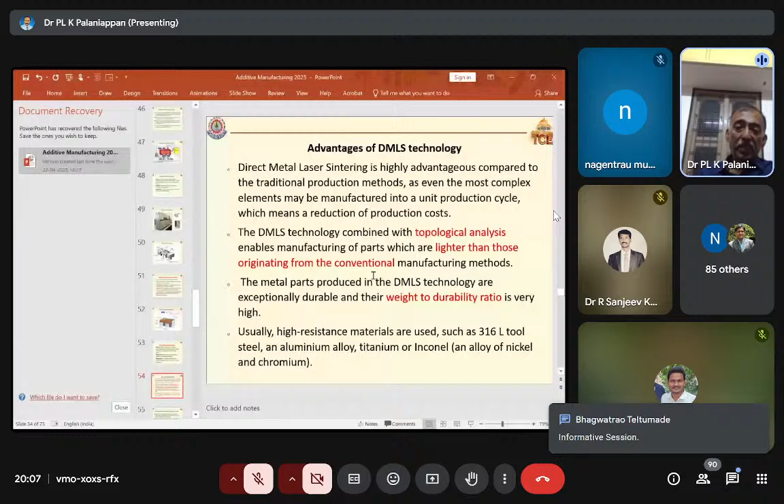Parts can be made lighter than those originating from conventional manufacturing - that is, you can achieve weight reduction, which is very much possible with direct metal laser sintering. So the weight to durability ratio is very high with DMLS parts. Since the product is lightweight, you can achieve high corrosion resistance with metals such as 316 stainless steel, 316L steel - an alloy of stainless steel used in medical and aerospace industries - and aluminum alloy, titanium, or inconel alloy, which is very hard and suited for high temperature applications, all of which can be made by direct metal laser sintering.

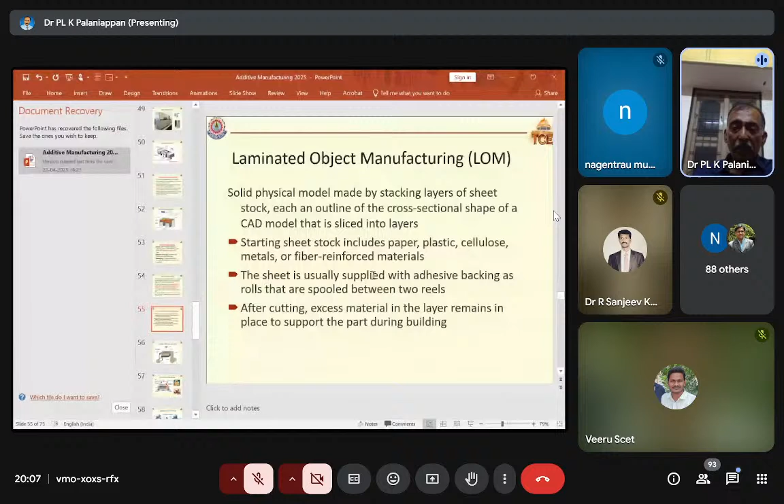The next one is laminated object manufacturing, which is cost effective. It is generally used for proof of concept, using papers, plastics, cellulose materials, or fiber reinforced materials. In this method, you build layer by layer. The only advantage of this method is that you can do it very quickly.

So we have a laminated object - a sheet stock, and the laminated block is built at the building platform. On the right-hand side, you have a supply roll, and on the left-hand side, a take-up roll. Once the parts are built, the built parts are removed and taken up for use. This is a product made using laminated object manufacturing, generally used as proof of physical prototype, where you want the appearance and feel of your product.

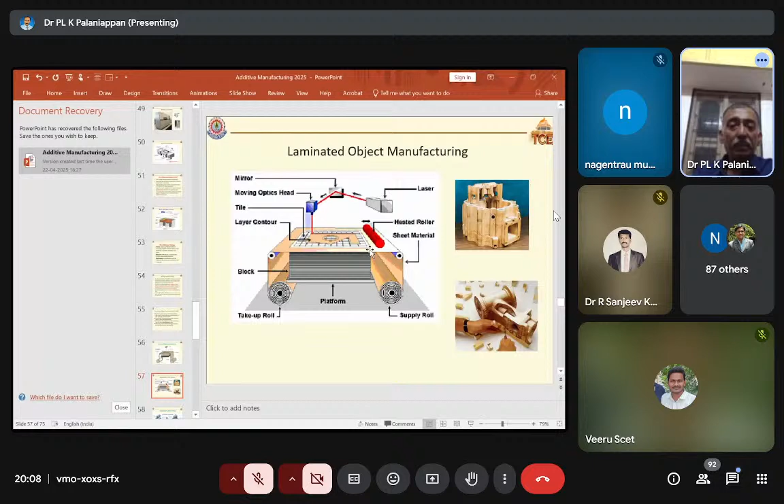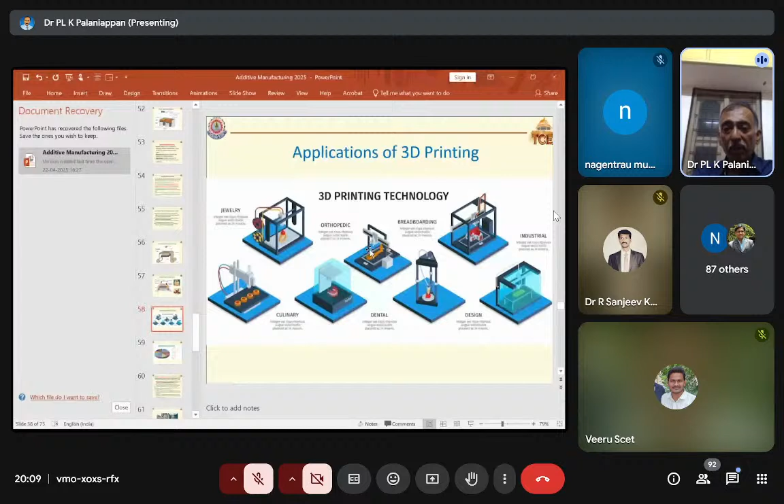Now we are moving on to the applications of 3D printing. As I told you, it finds application in almost all fields - jewelry, culinary (that is, in the kitchen), orthopedic, medical, especially dental, and general medical wing, breadboarding in electronics, and generally for any design, that is for rapid prototyping. In industries it is used to manufacture many products. There is also direct production possible with 3D printing technologies, and it finds application in engineering design and consumer products.

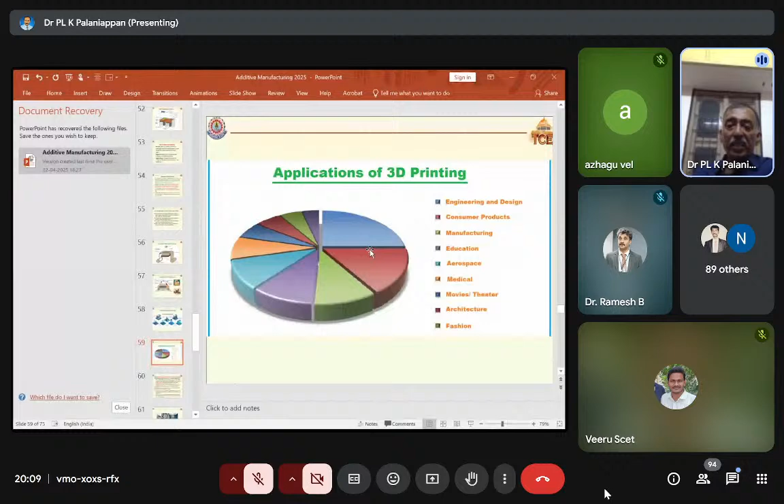Okay, fine, thank you. It is being used in education, aerospace, medical, even it is being used in movies and theaters also. Architecture people started using it - we are going to see some applications in the coming slides - and fashion technology.

In aerospace, lightweight printed aircrafts and spacecrafts are being used. Hindustan Aeronautics and Wipro 3D jointly did a blower component for the Tejas aircraft using direct metal laser sintering technology. They achieved 50% weight reduction compared to conventional manufacturing. You see the advantage of going for direct metal laser sintering.

It also aids the economy, because as weight is reduced in aerospace applications, your fuel cost is reduced - that is perennial. Operational cost is reduced, material cost is reduced, and it strengthens your circular economy to the greatest extent.

GE has first printed a 3D jet engine fuel nozzle - General Electric. So almost all aerospace companies started using these 3D technologies.

In automotives also, Mahindra and Mahindra produced 200 3D printed polymer parts for their vehicle prototypes. You see the scale in which automobile companies are using this. Tata Motors started using selective laser sintering to batch produce plastic and rubber spare parts.

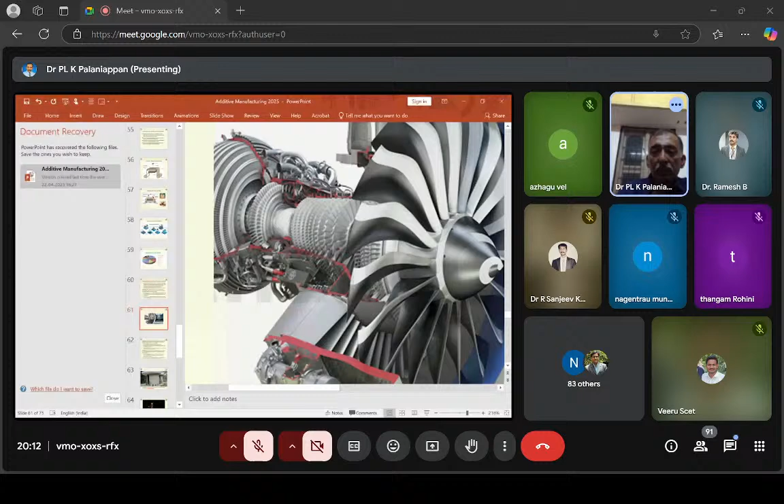In the construction industry, in India, they have printed houses - 3D houses - in just 2 weeks. Tvasta is the company; they have a technology called concrete extrusion technology by which they achieve this. The similar technology is being used in Ladakh, as I showed initially - that is IIT Hyderabad, which has done a joint venture with our military.

In Ladakh, Leh, they built a military bunker using this technology. And Amaze 28 is Kerala's first 3D printed building, built in 28 days with 70% reduced labor cost.

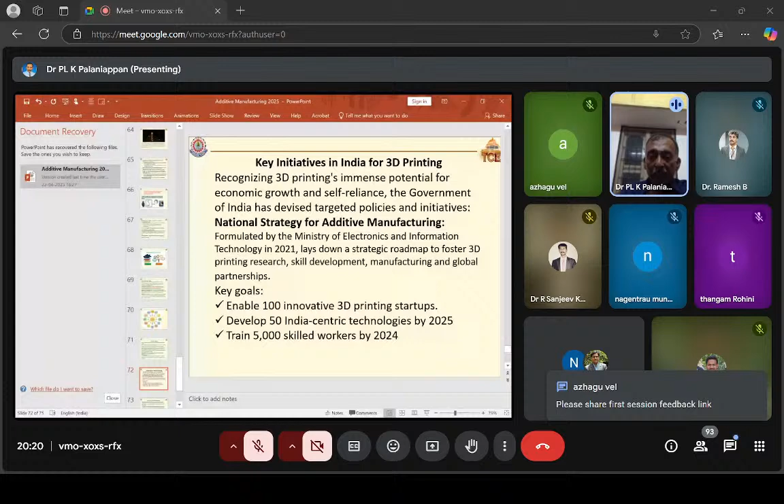The key initiatives in India for 3D printing include our national strategy for additive manufacturing. Our Ministry of Electronics and Information Technology, in 2021, laid down a strategic roadmap for fostering this technology. The key goals are to enable 100 innovative 3D printing startups, develop 50 India-centric technologies by 2025, and train 5,000 skilled workers by 2024. It seems the first goal is being achieved, that's what their website says. 100 3D printing startups have already started, and it is more than 100 now, what they say.

4D printing and other applications is another current trend. Apart from 3D, now they are moving towards 4D. 4D means your product will transform over time without the need for human interaction. Your product itself, like a smart material, transforms over time. That is being termed 4D printing, and that is the order of the day.

So with this, I sum up my lecture. Thank you all, thank you for your opportunity.